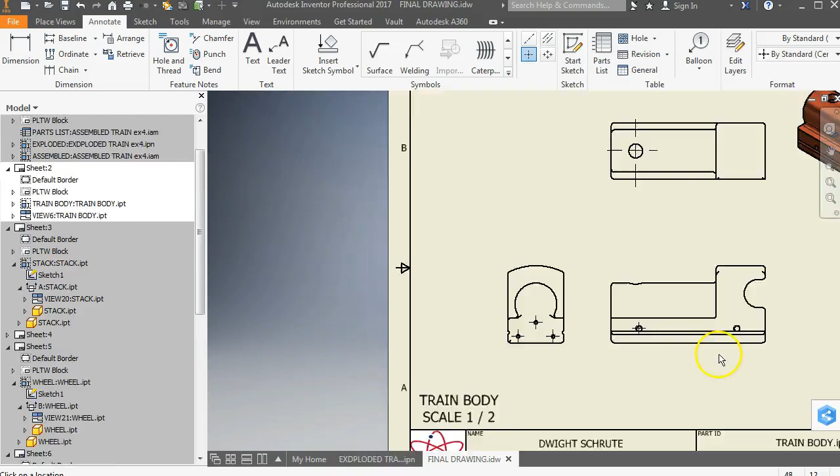The next thing we need to talk about is measurement precision. If you remember, you have access to these specifications I gave you at the start of this project, so you can see all of the measurements that you were supposed to use in developing your train. So when you model these things, or when you are doing this drawing, you need to pay attention to the number of digits that these measurements are, because that's one of the things we'll be checking.

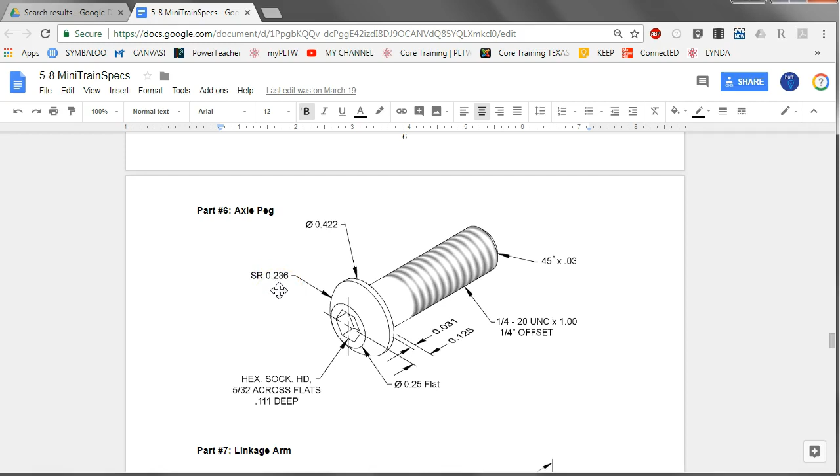So we're going to go through and do some annotation on this screw so that you can see how to do this. So we will focus on things that are visible in the projected or the orthographic views. Some of the things are not going to be easy to do without breaking rules about how to dimension. So looking at this screw, you can see that everything here looks like it's 2 decimal places or 3 decimal places. So in my example, I'm going to show some that have more than those, and we'll go from there.

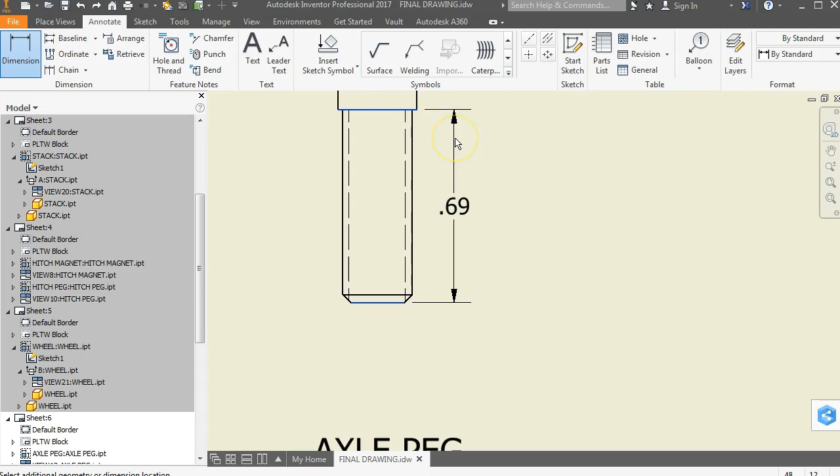Okay, so we're going to go in and do some annotation on this screw. And this is the modified one, so it's a little bit different than what you drew from the spec, but just measure it as it is. So this is not enough decimal places, so you can see how to change that, and I'm just going to randomly set some stuff here. I can see the number it is. It actually has a whole lot of decimal places, and I'm going to go to 4 on this one just because I can, just because I'm doing an example for you. So when I click on that, now I have that dimension there set very specifically.

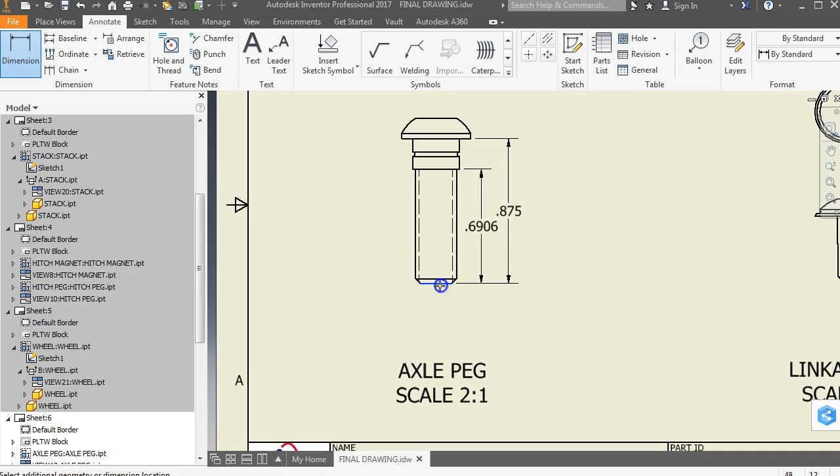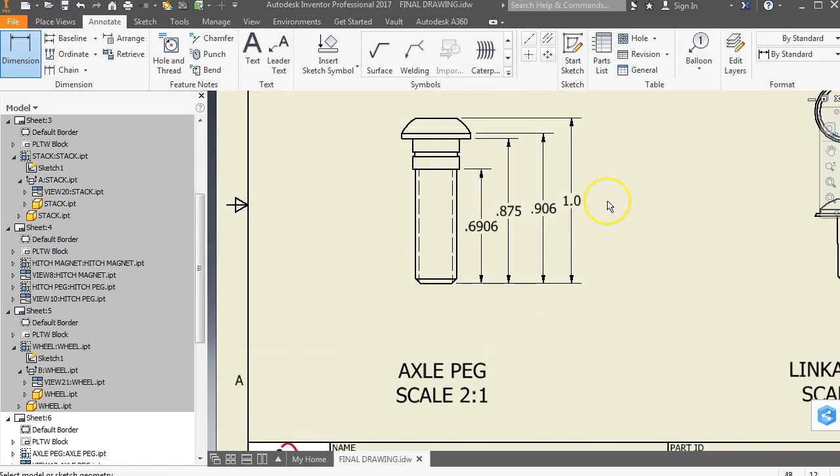Again, we would go from here to the bottom of the top part, and let's go to 3 on that one, and then I can go from the bottom edge. Remember, when you're doing these dimensions, go from the one edge to the top edge. So I'm going to go to 3 on this one just to make it make sense, and then I'm going to go all the way to the top. Notice how I'm not choosing the green dots, I'm choosing the lines, and that way my extension lines don't cross over the part. And for that one, we can stick with 1 inch because it's exactly 1 inch. Let's make it smaller. So if I wanted to go to 1.1 then, or 1.0, it would look like that. So now I have some dimensions here.

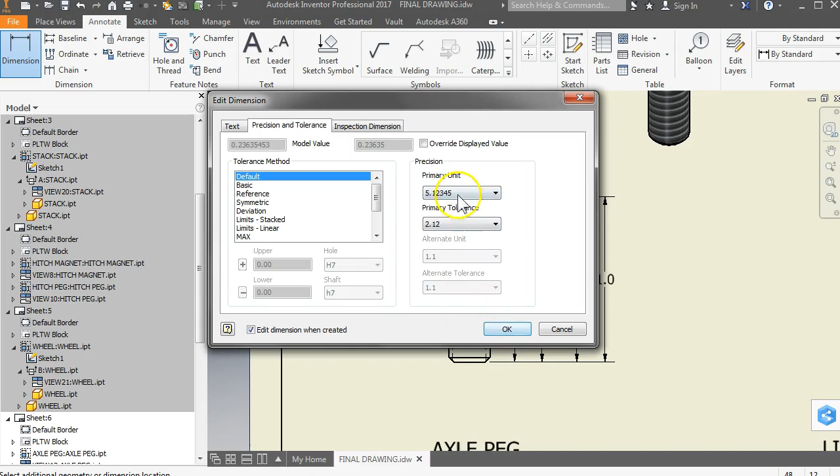Another thing that we need to dimension is this radius on the outside. It's going to say SR on yours, and that's fine. So I'm going to add this dimension. Notice it goes a long way, so for the purposes of this example, let's make it 5 digits. Or 4 digits. So the thing is, you'll want to match the precision that's presented to you. Even if the numbers don't match, you need to match the precision presented to you in that document.

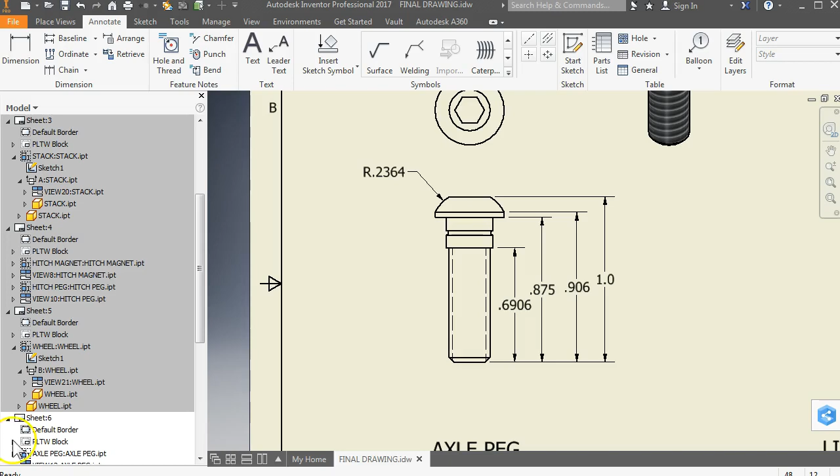Another thing we need to dimension is this. Let's see if this works. How do we do that? So I'm going to pause right now. Another thing to keep in mind is this part is threaded. So I'm going to use the hole and thread tool here to identify this dimension. So I'm just going to click on that outer edge, drag it out, and it tells me that it's a 1/4 inch 20 UNC 1A screw, and that's fine.

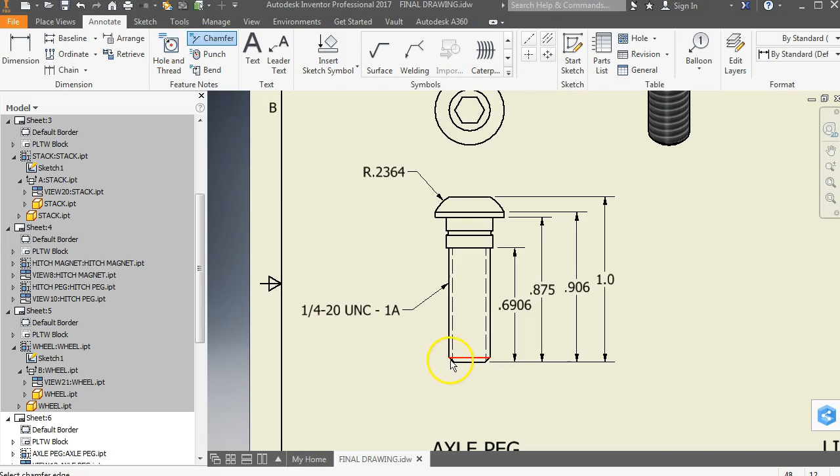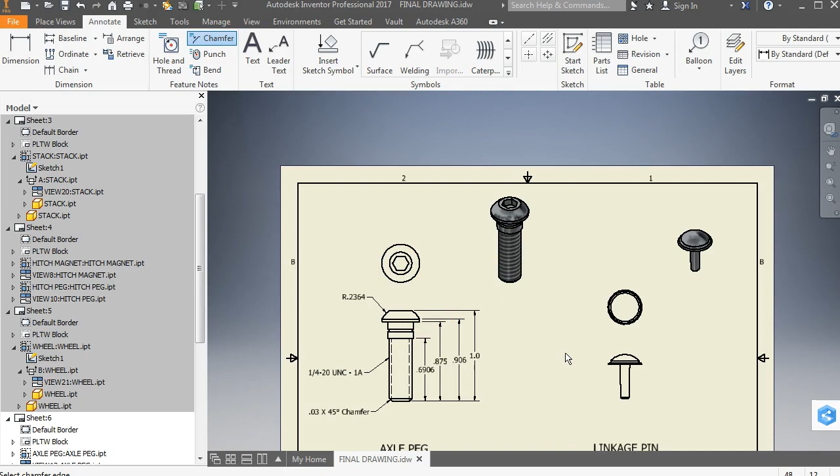Another thing we need to use is the chamfer tool, and if I remember right, you click on, let's zoom in, you click on this and then this, and it tells you the chamfer right there. Okay, so again, match the precision of the numbers even if it's not the same as the specification. If you're using the default parts instead of the ones you made, you'll follow that.

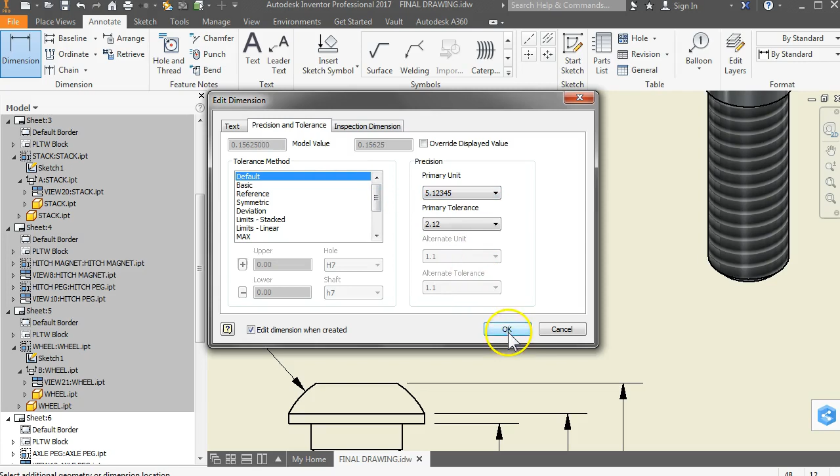Another dimension you need to show on this one is going to be the size right here, and I know in the drawing it says so many 32nds, and so we're going to change that to, let's go all the way to 5 decimal places on that. Keep in mind when you're doing these, if you're turning in a drawing here, every time you go up, it increases the cost to manufacture that, because the higher the precision, the more expensive it is to machine. Alright, I'm going to pause for a moment and see what else is missing.